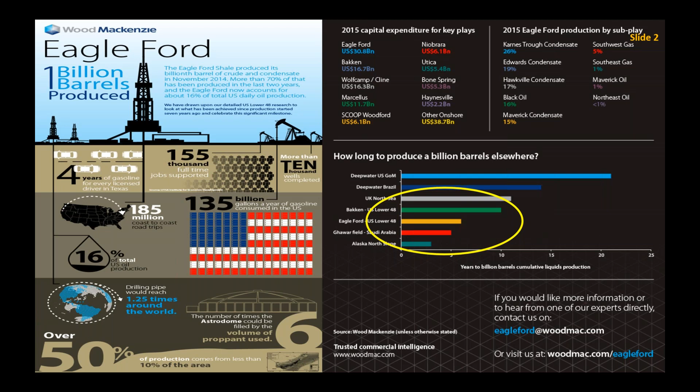And also you can see how much time it took for the US Gulf of Mexico to reach 1 billion barrels. So these are all the things comparing how much time it took at different time scales.

But the important thing is we have drilled for a particular shale field 150 million feet of well path. Now think of that. If we could approximate 1%, if we have an optimized system, if we could save, that will result in almost 2 million feet of well path.

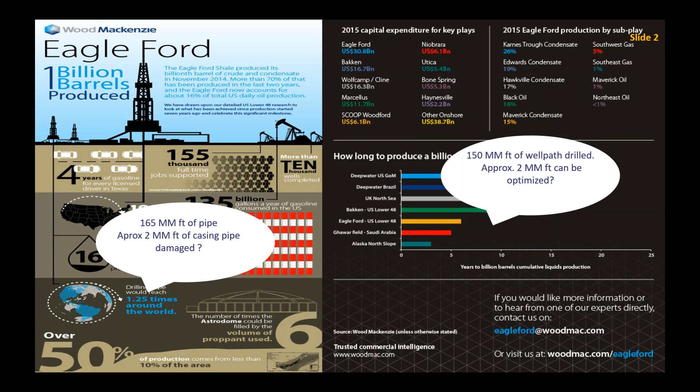Not only that, you can see another important point that this particular shale play has used a drilling pipe that can wrap around the world 1.25 times. In other words, that much amount approximately we have put as casings down hole. That is almost 165 million feet of pipes that have gone forever inside there. If we could save 1%, or if 1% is optimized, we could save 2 million feet of casing pipe. That is on the tubular side.

So now, with this panoramic backdrop of drilling this extended length of a particular shale play, probably you can relate to some of this. At some point, you might have seen broken pipe, sheared pipe, twist off, broken threads, collapsed pipe, burst pipes, more related to the tubulars.

As we deal with it, it's a complex system. Now, with this panoramic backdrop of the tubulars, if we go to the bottom, you can relate to some of the things. I have taken pictures from different sources that we will see. So we have a system that is very complex.

Now, how is it easy to say 150 million feet of pipe used, and saving 1% is going to save 2 million feet? But what are the complexities that we need to consider, and what are the things that we can see when we model this?

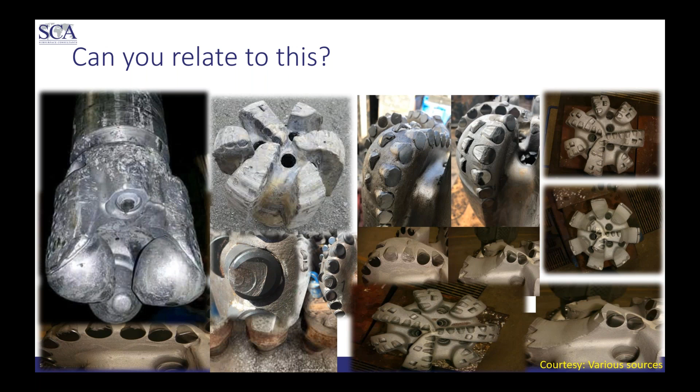So, as Susan mentioned, I teach 72 hours of drill string mechanics, optimization, mud motor operation for a particular one. I just condensed it into a few high level topics that you can see, and the rest will be taught in the class: well design, drill string mechanics, drilling optimization, and how do we calibrate?

We have complex optimization techniques, all these things. How do we calibrate and realize the importance in the value chain in real time? So some models have to be calibrated as we get more and more real-time data. And a lot of downhole tools we use.

One special tool that we want to go through is the mud motor. We have a comprehensive mud motor operational class that spans 2 to 3 days. We will have hands-on experience, hands-on practice of using and calculating different solutions.

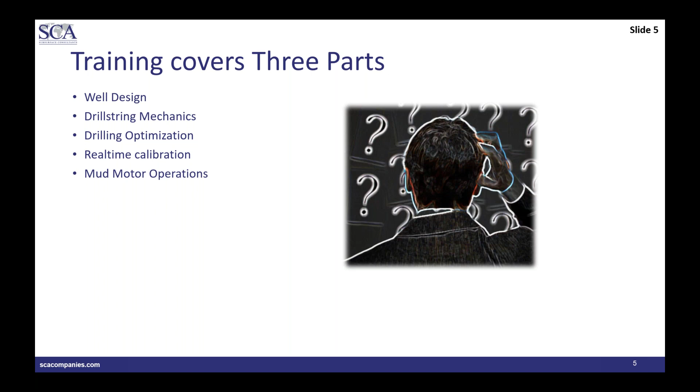With it, I will take you through a few high-level basics and understanding how they are interrelated. All the classes will cover the basics. Start with the fundamentals, because we need to have the basic knowledge. It is not that we need to develop or derive equations, but we need some basic principles on which these models are built. So we have a comprehensive understanding of tackling any problems beyond the classroom teaching or education.

So I'll go through a basic, simple example of mechanics: thin and thick wall cylinders. That is well studied in the mechanical industry and chemical industry, as we handle all these things. But we deal with a different system. However, we have to follow that slenderness ratio.

So we have an inside diameter, outside diameter, length, and obviously thickness of the pipe. Based on that, it is well defined as D over T, or the slenderness ratio. If it is greater than 20, it is called the thin cylinder. If it is less than 20, it is the thick cylinder. Why is it important? Because that dictates how the stresses are going to act.

So now, how does it relate to our system? Now I have given a few examples. Most casings used in the oil field have a D over T between 10 and 35. It's a wide range, right?

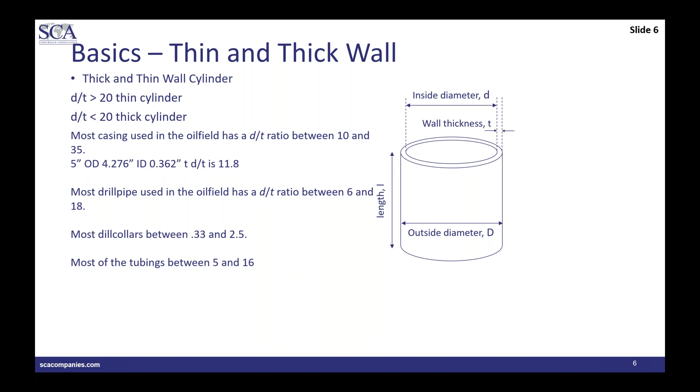But if you nail it down to a particular pipe, say a 5-inch drill pipe using a 4.276 ID, you can see the slenderness ratio D over T is 11.78, which falls under the thick cylinder. Most drill collars vary between 0.33 to 2.5. Most tubings are between 5 and 16. These are important as we develop the models.

Now another point is, this is the cross-sectional dimension that we have gone through. Now what about the lengthwise system, which we call the aspect ratio, length over diameter of the pipe? Think of a 40,000 feet well we drill. It has an aspect ratio of 100,000.

Very high aspect ratio that we deal with. We deal with a complex system. The closest you will see is the high wind turbine towers or the nanotubes. If you take a human hair, to match this and visualize it, it should have a 60 feet human hair that will have a 100,000 aspect ratio. That is the complexity that we'll deal with.

One is the thin and thick cylinder, the other one is the aspect ratio. Now we have to model it, and we have to design the well that can handle these tubulars. Ultimately, we have to construct the well and also calibrate the models in real time.

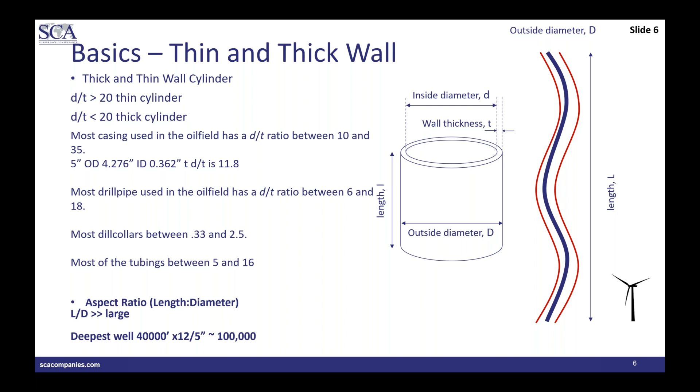So the practical calculations are, we need to have the hook load, then the forces, stresses, and we have to limit all these calculations in order to find the failures, whether we are in the failure envelope. We don't want to exceed with a high aspect ratio system. And also it is not just a tubular, we have a lot of tools that we are putting downhole, expensive tools.

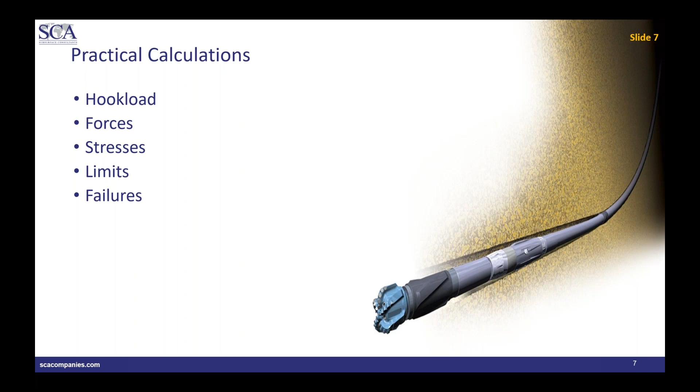So forces, we need to calculate the forces. It is easy to calculate the forces outside in a mechanical structure or anything, but when it comes to downhole where it is immersed in the fluid, it becomes more complex.

So we use two forces on that. One is called the true force and the other is the effective force. It is a very confused calculation people think of, right? So I'll deal with this on a high level, but in the class I will give you more examples and go through the differentiation, why these are the two forces in play.

Now at the top, we have the tension, or we eventually calculate the hook load. Now, is the fluid force going to cause the buckling? Is it going to fail the pipe on its own? We have found and also theoretically proved it is not, because the fluid forces alone won't buckle the pipe. You need to have the mechanical loading at the pipe.

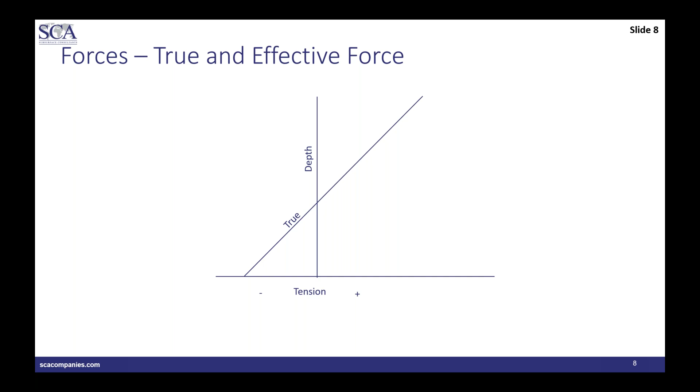Now, if you apply weight on bit, it will move to the left. So we take the fluid forces or the hydrostatic force out of the true forces, then we plot it and we call the effective force. That is, the effective force at the bottom is now in the neutral point.

At the surface, whether it is true force or effective force, you need to have only one single force. You cannot have two forces. Now, we take all the way from the bottom to the depth, which we call the stability force, fluid stability force. That makes the system stable when we have the hydrostatic force.

When we start applying the mechanical loading in form of weight on bit, both the lines, the true force and the effective force, equally move to the amount of weight on bit you apply at the bottom.

So now we have a limit on the right side, which we calculate based on the yield strength of the pipe. On the left side, we make it as a buckling limit. It is not a failure limit. We calculate the sinusoidal buckling and helical buckling based on analytical methods, and we plot that, and we want to stay away from the helical region or sinusoidal region.

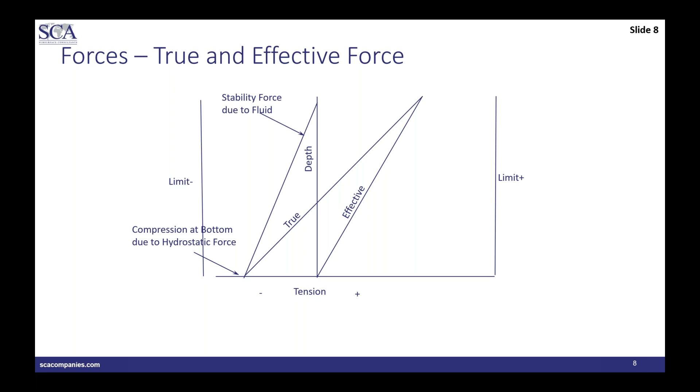So these are the limits that we take into consideration. One is the limit of failure, the other one is the limit of buckling. As long as the forces are within these conditions, we tend to be okay, and also we calculate how much is the overpull between the top at the surface and the limit forces.

Now we have to take this into a higher level. The force we calculate, from that, we calculate at each point the side forces, the bottom forces, the top forces, and we start integrating all the way to the surface. Now this has to be done for all the operations. We have to have the drag calculation, torque calculation for tripping in, tripping out, rotating on bottom, rotating off bottom, sliding, back reaming, and the other related operations.

So this forms the basis for all the force calculations. When you take the torque and drag, it not only calculates the forces, but also includes all boundary conditions that are related to different operations.

Based on that, we can calculate other things like buckling and the effects of friction, and more into the friction calibration, friction calculations, drag forces, side forces, that will be covered more in the torque and drag class. Then we have to take into effect the mud properties, weight on bit, surface pressure.

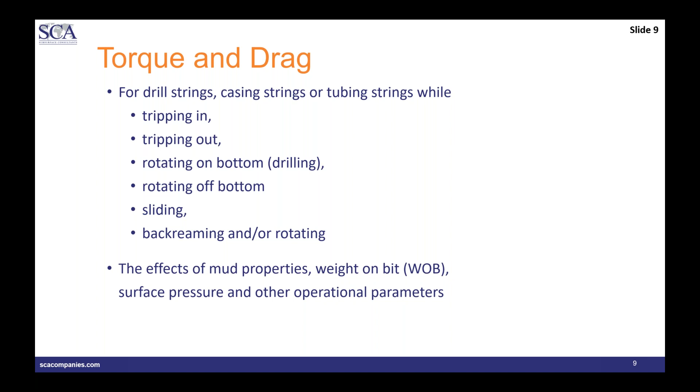Now, when it comes to the torque and drag model, there are different models available. One is the soft string model. The soft string model is the well-known model that has been used in the industry for a long time.

So now the contrary, is it true? If I have a high dog leg, the pipe, if I take a 30 foot pipe, it may not go, or 90 feet to stand. So we need to consider whether the forces calculated, and thereby the stresses, are correct when we use the soft string model.

For the hook load calculation, it may be okay, but we need to estimate the accurate stresses when it considers the right side limit of yield.

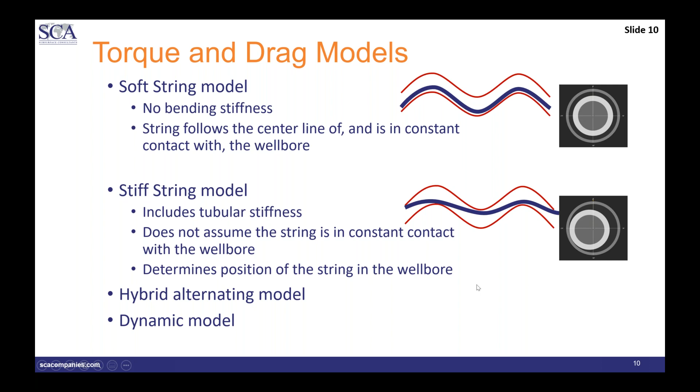So next one is the tubular failures. We have calculated all these things. We have a good prediction. Now, what are the limits that I have shown?

Failure, that is the important one that we see, and we use the traditional mechanical failure approach: material failure, structural failure, go through the static failure analysis, whether it is brittle or ductile, where the stress strain curve is different. And if it is fatigue, a lot of companies do more time-based fatigue analysis.

On a static torque and drag, you can see a simple comparison quantifying the magnitude you are going to fail if you are not taking proper precautions.

I'm not going to cover on the buckling. Buckling is a difficult left side failure. I'll cover more in the class.

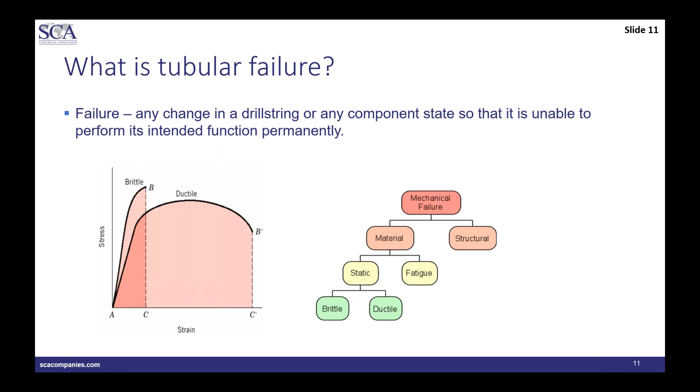So continuously on both the sides, limit curves, there are four forces, right? Internal pressure, external pressure, real axial force, then the torque.

The combination is important. So we use the von Mises failure criteria to compare the limits. As long as it is within the von Mises limit, we are good. So it gives a failure limit of von Mises.

So we have all these forces taken into consideration. And also you have to see, we have to find the pressure difference, Pi - Po, the burst, the collapse have to be considered with. Probably on the drilling side, we may not encounter this, but when we float the casing, when we run the casing, these are all important.

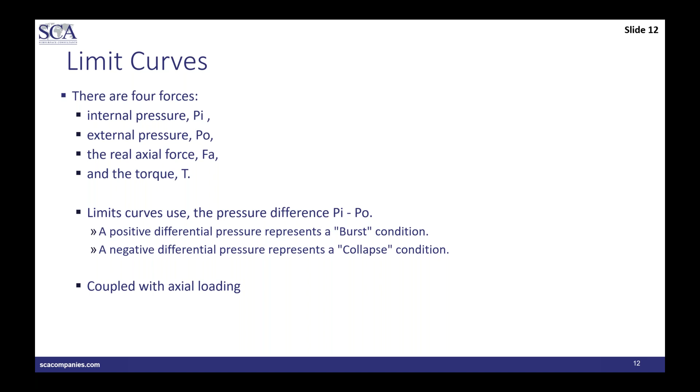So the coupled variables with axial loading is important. And it has been well studied and well documented. We'll go more in detail as we study through this class.

Other topics of interest in the design of the tubular design is pipe stiffness. As we have seen, pipe stiffness, how do we transition between the pipes, drill collars, heavy weight, all these things, bending stress ratios.

Then the important one is the friction. That is the starting point of all the torque and drag calculation. Now, static friction, do we consider kinetic friction? With the static models, always use one friction factor or the friction. We don't use the Coulomb friction. We call the friction factor to wrap all the uncertainties into this one calibration factor.

Now, neutral point. We have true forces and effective forces. You saw the neutral point differing. Which one do we use it?

When we do the soft string model, how do we magnify the stress? I don't want to use the stiff string model. You're saying the stresses are not properly calculated. It may be underestimating it. Okay, can I magnify it still using the soft string model?

Bending stress magnification factors are introduced, so that will magnify to a certain level so that it matches with a stiff string model. Ultimately, it may negate the positive side of the stiff string model if it is properly applied.

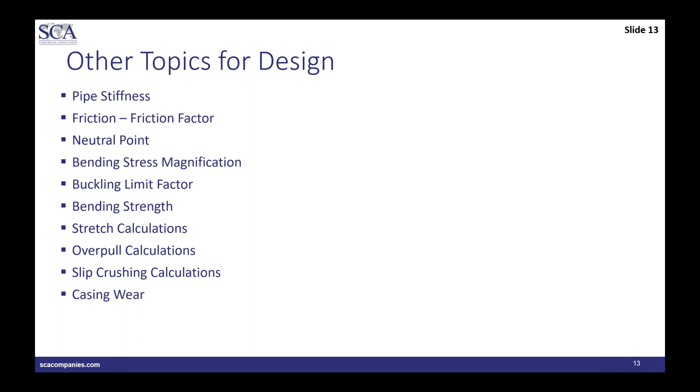Finally, casing wear - the pipe that is being worn out, how much it is getting degraded. We don't consider a lot. For all these Eagle Ford wells, I was planning to estimate how much casing has been worn out approximately. So the casing wear is an important one on the well integrity value chain, but it hinges on the torque and drag calculations, which I will show in a later slide.

So casing wear, it is a puzzle - contact force, wear factors, groove positions, wear logs, wellbore. Now contact force, where we have a friction factor. Now we have casing wear, that has another wear factor, which was done 30 years back. Now I have initiated a JIP, and with new materials, the technology has changed.

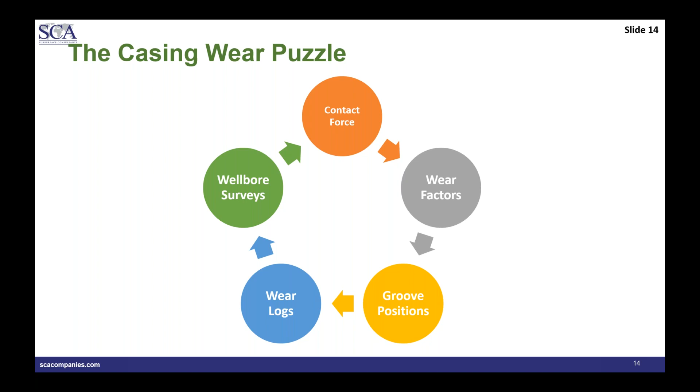It's no more a black box. So more details are emerging from the new wear factors that will be integrated into this calculation, and we can calibrate also later using the wear logs and other surveys.

Now the question is, we have two models - soft string, stiff string. Contact forces are not the same as soft string, where stiff string has a well-defined contact point based on the model as well as on the wellbore. Now if the contact points are not properly estimated, then your wear factor, wear estimation, casing wear, volume wear is going to be wrong.

In the soft string, it is going to assume it's going to touch all the way, whereas the stiff string model will take into consideration where the contact points are, and that also on 360 degrees, where you can see the groove overlapping depending on the operation.

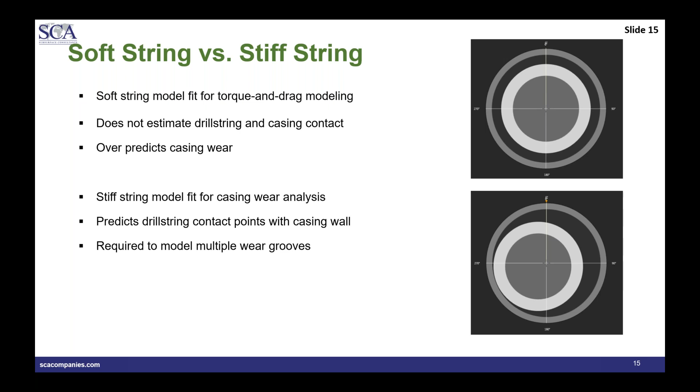You may have a different contact point when you're tripping in, and when you're pulling out it may be a different contact point, so the grooves may not overlap. Sometimes we may overestimate. Soft string may give a conservative estimate, but that's not true all the time. You can see it can touch at different points in the same well, and it may be different for the same depth for different operations.

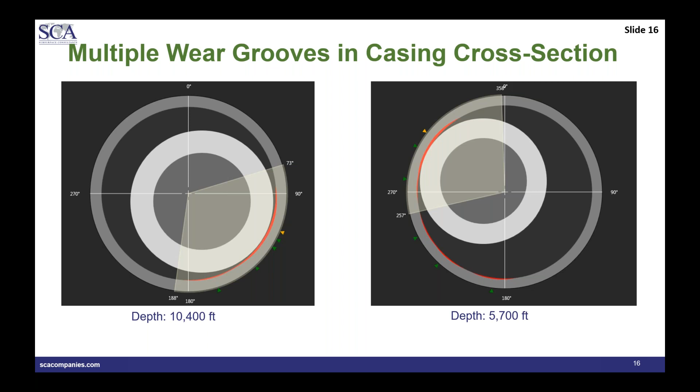So I tie all these things to the well design. Eventually, it all depends on the contact between the wellbore and the string. I started with the string - now we have to go with the well design.

I'm not going to cover different types of well designs and everything, but in the classes you will see how they are related and how you can quantify and estimate it in a coupled manner of well design, well path, and string design. So it gives the quality of the wellbore.

Less side forces are important, which you can see in running of the logging tools. Wellbore stability, the direction that you need to go - less side forces, less tortuous, and less impact on the tools that we use.

And if the string is vibrating - I have not touched upon the drill string mechanics, vibrations, and drill ahead, that is another topic that we need to deal with. So what happens when the string starts vibrating?

The impact forces are important. How much is the magnified contact force? How much is it going to affect the casing wear? So we have to reduce the side forces. The well path can be tweaked in such a way that these forces can be reduced, thereby you have less torque, less drag, and also

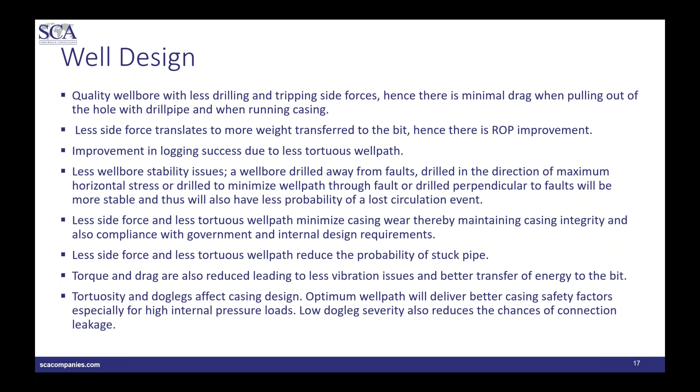When you look at optimized well planning methods, there are different methods available. Now, with one click, you can get a different optimized well path - not only one path, but also in a pad, or multiple pads, or multiple wells.

Optimized tortuosity method, dogleg severity, or you can compare the absolute and relative tortuosity. And there is another one, wellbore torsion.

That is important. Torsion is different from tortuosity. Torsion defines how the wellbore is twisting with reference to the plane of space. So that can tell how the wellbore is spiraling, whether it is a right-hand spiral or a left-hand spiral. Always we talk about right-hand walk and left-hand walk of the bit, but how the wellbore is spiraling is important. At some point, it can flip based on some of the survey analysis.

Another one is the well profile energy. Based on this coupled well path with the drill string mechanics, you're connecting through the energy, the strain energy, the bending energy, or the twist energy, so that you can minimize not only the well path but also the energy on the string.

Then drag force minimization. Another one is considering the productivity of increasing the lateral length. We cannot increase the lateral length as we want. Not only the mechanical limitation, but also the hydraulics limitation and production limitation that we need to take into consideration.

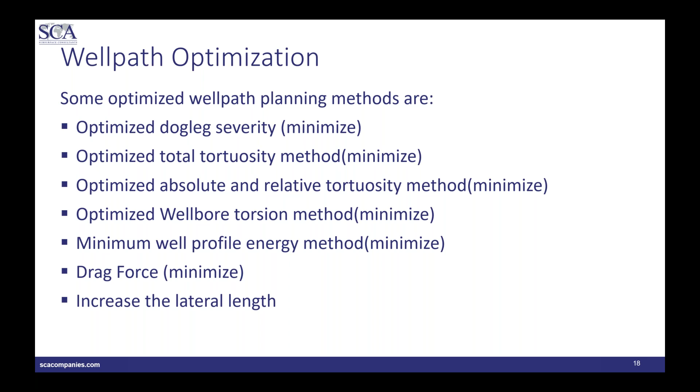Reservoir exposure, which I have touched upon, wellbore trajectory complexity, incident angle, different catenary design for extended reach, torque and drag, all these things. Now we can drill a long lateral length, but the question is whether we can run the casing to the bottom.

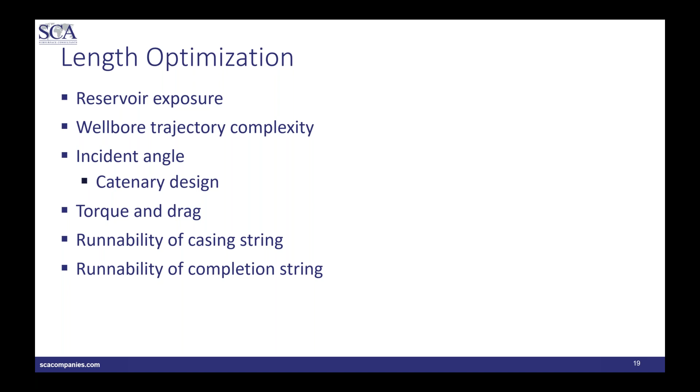That is important, the runnability of the casing. If we cannot run a casing or a completion string, then it is of no use just extending the lateral length. So these all have to be tied with that, which will be covered in the length optimization.

Speaking of optimization, it's a 3-day class which I cover extensively, optimization and real-time optimization, but I will go through it quickly. And still the industry is confused between performance, efficiency, and optimization. I will give more examples in the class, but for now I will just skim through some high-level slides.

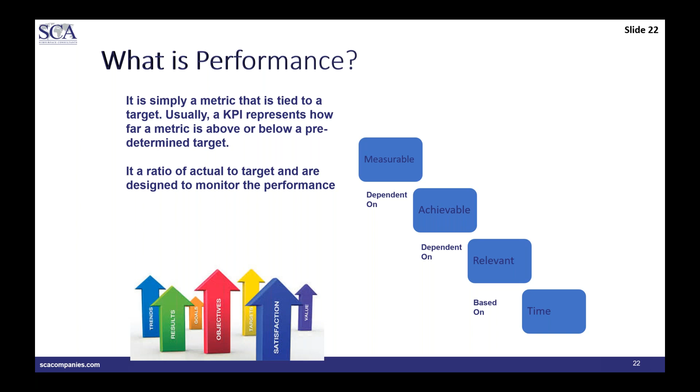What is performance? It is measurable, dependent, achievable, relevant, and based on time. We have a KPI, then you fix a performance and performance criteria. If it is achieved, now everybody is achieving it. Next year you move the scale, then you compare it.

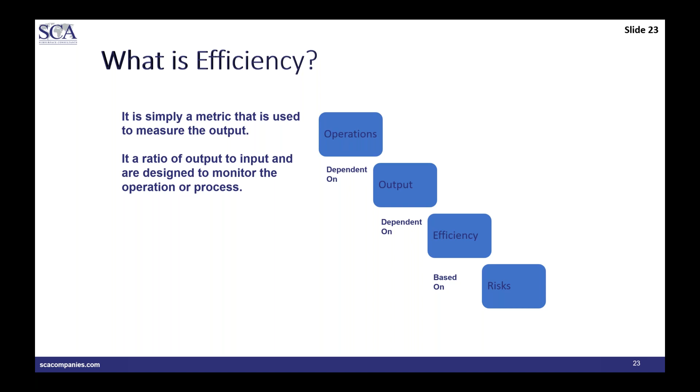Now, optimization is a mathematical technique or a heuristic method that you use to find out the maxima or minima. That is the objective function, what you want to achieve, subjected to some constraints.

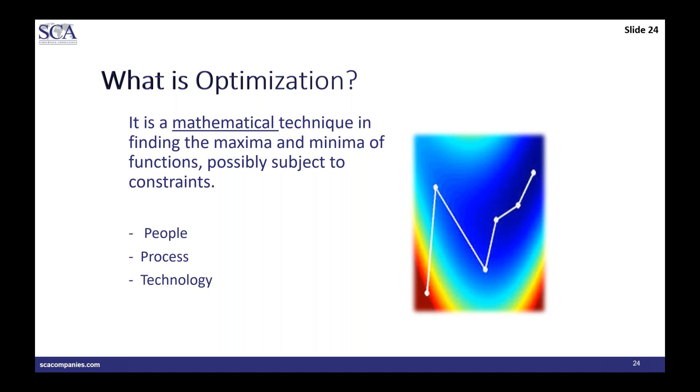People, process, technology, you have different constraints. Now, weight on bit is a constraint, flow rate may be a constraint, pressure losses may be a constraint, and what do you want to achieve? Whether you want to maximize ROP or you want to minimize energy, all these things need to be taken into account.

So a lot of topics by nature, on their own right, you can do optimization just on well path optimization, or wellbore optimization, or flat time reduction. But you can also do a system approach of comprehensive optimization. Then it becomes a very complex condition with multiple variables.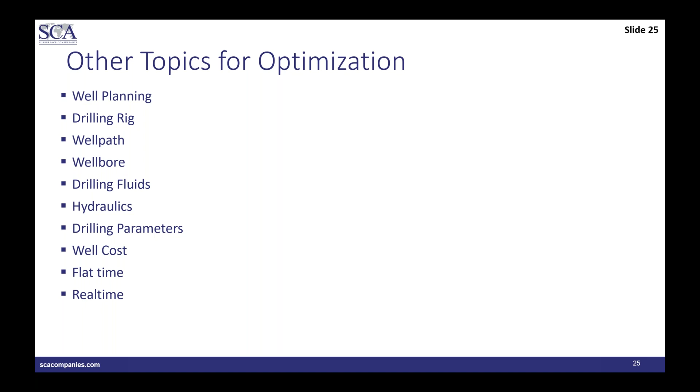But all I want to see is a simple 2D chart or a 3D chart, weight on bit and RPM. What is my torsional instability? Where is my lateral instability? What is the maximum weight on bit that I can apply without failing?

What is the ROP? As the bit wear couples, how does it degrade? Hole cleaning, maximum RPM in case of mud motor, what is the stall RPM? All these things.

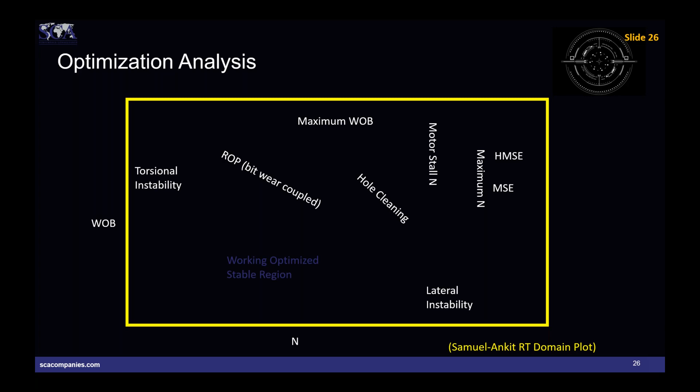MSE, mechanical specific energy - I can narrow down based on this constraint what is my stable optimized region. I can consider this as the optimum-satisfied condition where I'm okay with this. All these conditions are not going to happen exactly, and still I have a complex system, so I may not be able to exactly narrow down this space.

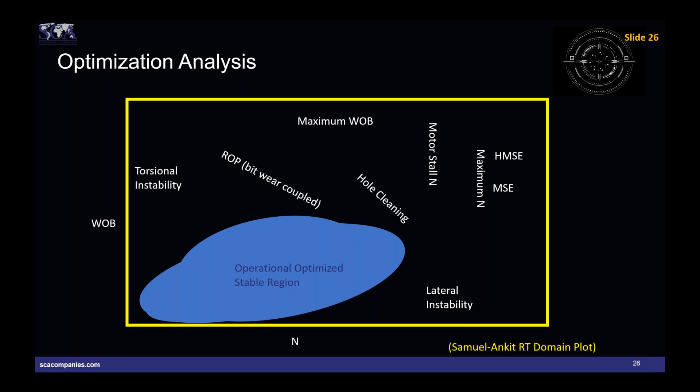So I have an uncertainty or probabilistic estimate over this, so that I have a probabilistic optimization model. Now, hydraulics optimization, the traditional HSI and impact force which are used, but I will show some of the pitfalls if you are using a mud motor.

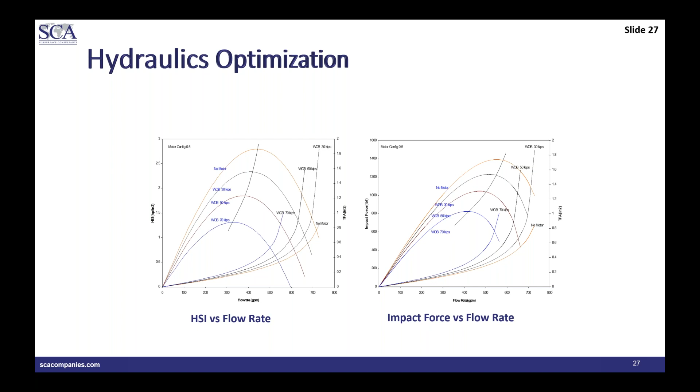It is completely different because it is an energy converting machine that we are putting inside. That needs to be taken into consideration.

Dynamic optimization, as we move on to real time—I think there's a typo—it's a real time physics and data driven model that takes into consideration both the microservices in real time and comes up with an overlaid uncertainty model.

This is a three-way coupling. Usually people talk about data driven: you give me data, I can use some glorified regression model and fit it and predict it. It's not. It doesn't know the physics. It doesn't know the domain.

It knows the fundamental physics, but we built all these things based on assumptions. So both will handhold in such a way that maybe 70% physics and 30% data, or 30% physics and 70% data, so that they adjust the model in such a way that you have a better prediction. And still we deal with a high aspect ratio system.

Lots of uncertainties. We don't have a lot of sensors, so we have the probabilistic estimation. If your inputs are stochastic in nature, the output is going to be stochastic in nature. So this gives a three-way coupling that we need to use.

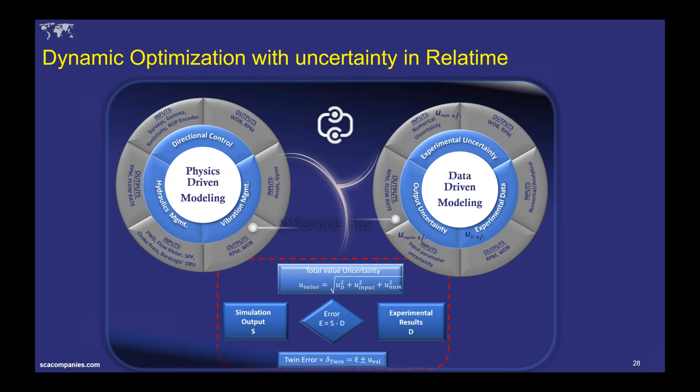That is much better than the hybrid model. People introduced a hybrid model a few years back, maybe 10 years. Now this three-way coupling will have a better prediction compared to pure physics or pure data.

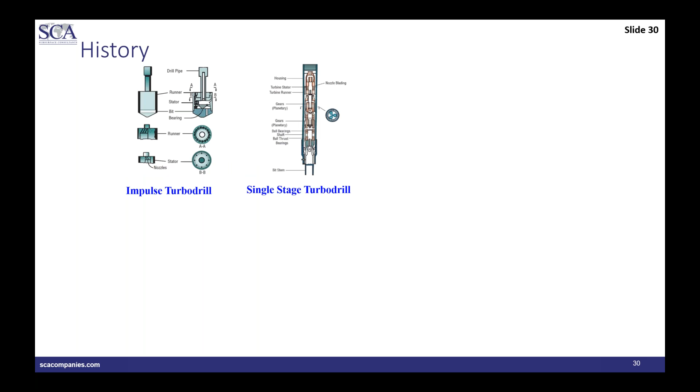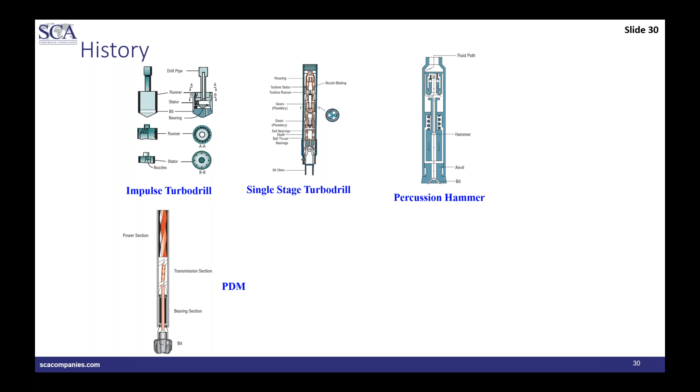I will touch upon only one component, the mud motor. The mud motor has a long history—impulse turbo drill, single stage. Then we started using percussion hammers in '84. Then came the PDM, the positive displacement motor, which we now call generically the mud motor.

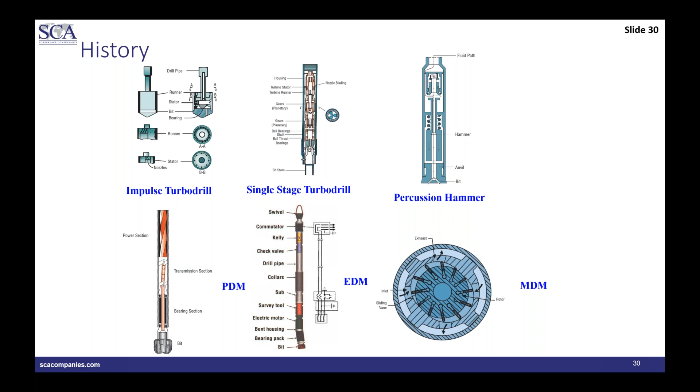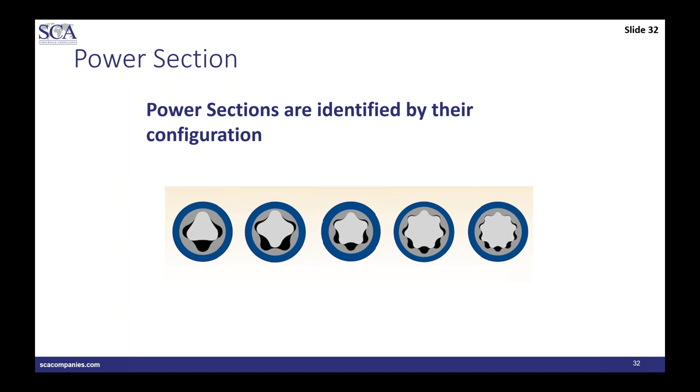So that is the one—why it is positive displacement, why motor, what are the different configurations, what is the optimum selection that we can use, different types of configurations and lobes and even wall, and how we can use it under different scenarios.

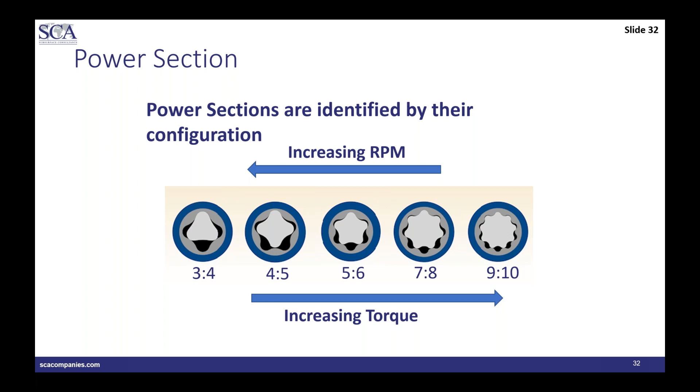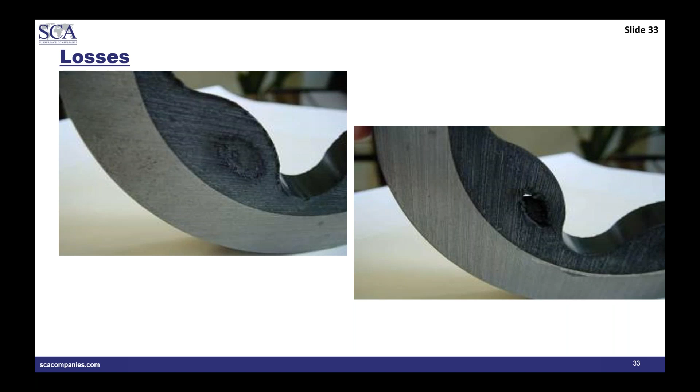What are the failures or the losses, even though they are very good? Now it can drill vertical, build, and lateral, but it still has limitations that we need to address.

And what happens when we put it in a motor configuration? Always use the 3-point configuration, but what are the fallacies? What are the failures? What are the pitfalls of using this model?

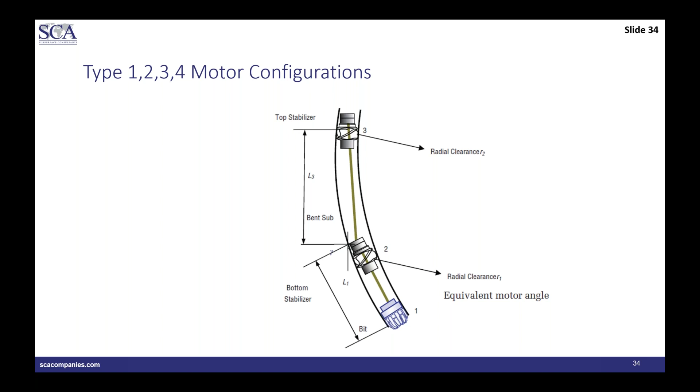And how you position the bent sub along with the mud motor will be covered. Then mud motor operational roadmaps will be comprehensively covered in this class, covering the power section detail, different designs, operational envelope, performance curves, and the effects of using traditional surface measured performance curves to calibrate the downhole performance of the motor.

What are the effects of pipe rotation—that is, when the mud motor is in rotary mode, what are the limitations? Sometimes it will go into pumping mode rather than motor operation. Pipe rocking and motor operation, MSE—how the traditional MSE equations are valid. There are a lot of wrong equations given in the industry, but we have to consider that too.

Dynamics of the mud motor—what happens when you have a mud motor in the system? It is an inherent source of vibration because it rotates eccentrically. So how do we take that into consideration when mud motors are used? How reliable is the prediction of vibration frequency from the software when a mud motor is there?

I'll cover that also in the class, repair and maintenance, of course, the final one.